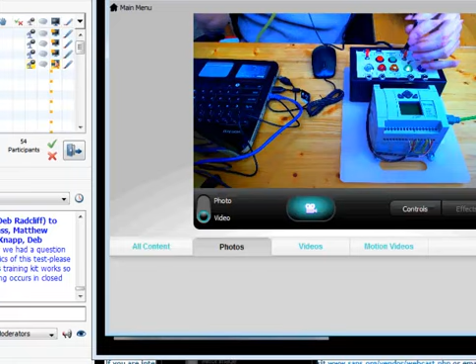I know it's a little hard with the lighting, but the red light is indicated, which would be a motor or a pump, and now we also have the green light indicating some actuation of a motor or pump. Just to show how this would work, we just updated this kit literally 2 weeks ago to now include real physical I/O. So here's a water pump, and I can plug it directly into the environment, and now you can't hear me very well because the pump's actually making some noise.

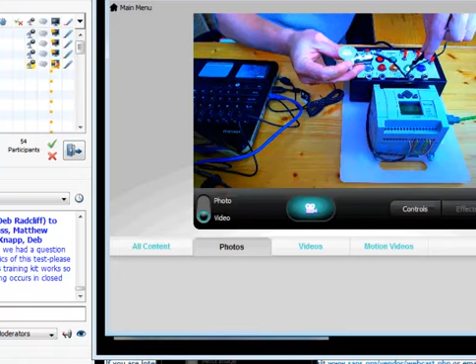But this is what I demonstrated at a conference last week, showing how you can attack a water tower specifically. And in this case, I also have a little solenoid here that's being controlled. This attaches to a little water bottle, which acts as my water tower. One of the many examples, we've also built this kit out for power grid or smart grid demonstrations, or even railroad manipulation switching. But this now includes the ability to include physical connections or capabilities.

So let me just show an example of just using RS Logix to do an attack. So you can see on my screen here, this would be an administrative platform that I can use to capture the payloads or the Ethernet communications going on between a workstation and the controller, and then potentially replay these. So what this application is showing is the current status of what's happening in this environment. You'll see that right now the green light is turned on.

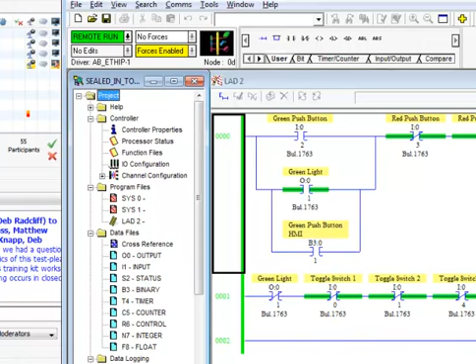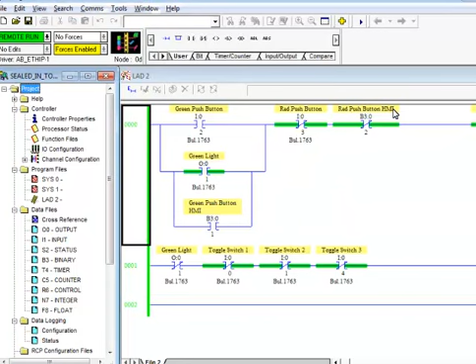Expand my screen a little bit. By the green indicator within the ladder logic program. If I were to turn it off, you'll now see that it's no longer indicated as being actuated. And if I go back to the actual physical representation, the real live controller, you can now see the red light is turned on and the green light is turned off. I'll turn back on the green light. I come back here to the RS Logix application, and now you can see that green light once again has been actuated. That would be our motor that we're actually running.

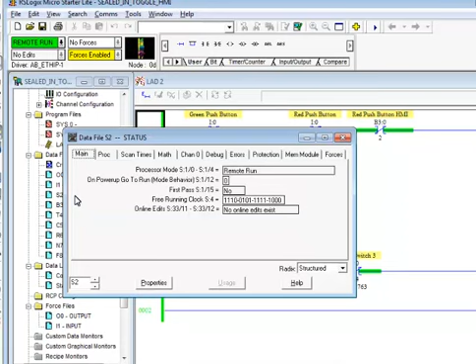It's very, very simple, that faulted attack that I was talking about. It requires you to change a bit within the status file. The status file is open to any authenticated user, and again, most of the PLCs that are out there and deployed typically either use a standard password or a password that's been around for years, or maybe even no password at all. And all I would need to do is go in to the Errors tab. You can see on my screen several bits that are stored within the local memory of this controller. You can also see up in the upper left-hand corner, it's in remote run state.

So this controller is set up. It's actually running and operating right now as we're able to change the sensors, the toggles, the push buttons, as well as the actuators, the outputs. All I would have to do is change this bit right here. And know that I'm controlling this environment over EtherNet/IP right now. So all I would have to do is capture setting this to 1, and immediately the environment becomes faulted. You can see in the upper left-hand corner, a fault has now been created on this controller.

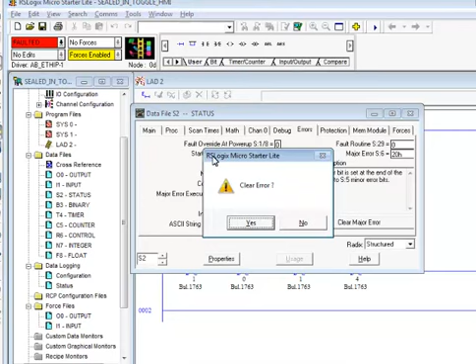If I were to go back and look physically at the environment, there's some little lights up here. I know you can't see them, but one of those is now lit up that says I've had a runtime fault. Now I'm going to go ahead and clear out that fault, change that value back to a 0, and then to re-enable it, I need to clear the fault within the application and then go back to a remote run state. So right now I'm actually just in a programming state.

Now, specifically the Allen Bradley PLCs can be configured for how they respond whenever there is a fault, whether they're going to turn off certain outputs or not. It depends on how it's configured, but the reality is, if I take out a PLC, in what state was

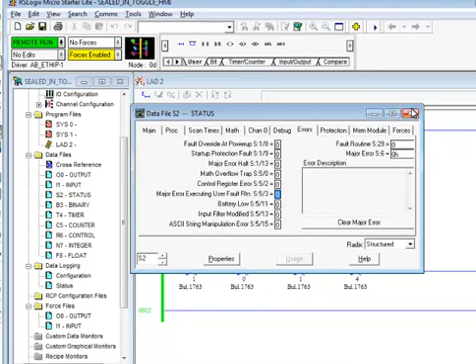that output left in? Was it in a crank-up state? Was it in a ramp-up state? Could some kind of physical destruction come out of this if I could take out the PLC? And that really depends upon the ladder logic and how it's been programmed, how it's going to act.

So let me show another example of an attack. In this case, you can see we're back in live, and here's my HMI operator workstation. I'm going to do some toggle changes, and you can see the input 01 just toggled up, and my output is no longer actuated. I toggled it down.

Again, the inputs are saying that there's an environmental change that has happened, a pressure change, a valve change, and then the output being actuated could be a motor. So whenever you have that red light being turned on, it could be a motor that just got actuated.

So the other example of an attack that I'm now going to do is using a virtual machine within this laptop, and it's based upon Backtrack. It's been heavily modified. I didn't want to have to modify it heavily, but the reality was to do some of these attacks, it required a lot of updates.

And in fact, I had to roll back from Backtrack 5 to Backtrack 4 Release 2 because Backtrack 5 wouldn't let me do man-in-the-middle attacks. There's some kind of network driver issue in the original release. I haven't tried it in the subsequent release because I've modified this so much.

But what I want to show is one of the labs that's available in here, Lab 5, and essentially it's already pre-scripted to do this man-in-the-middle attack, giving false readings to the HMI. And I do it using Ettercap. So if I go into the Ettercap folder, I then have some shell scripts that are already programmed.

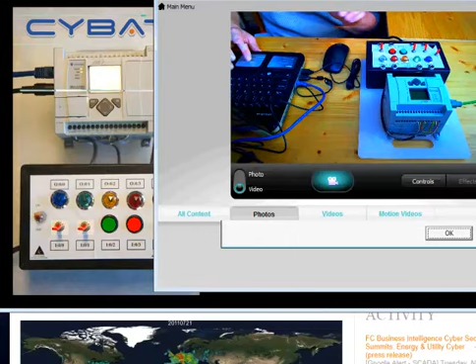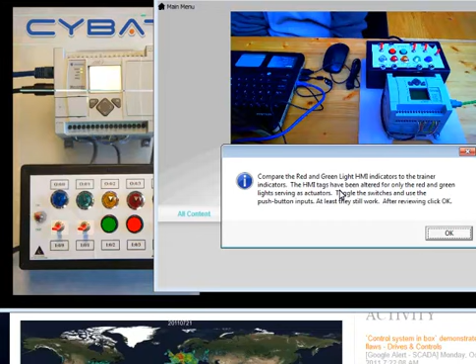So what's happened? Compare the red and green light HMI indicators to the trainer indicators. The HMI tags have been altered only in the red and green light, serving as actuators. Toggle the switches and use the push button inputs. At least they still work. After reviewing, click OK. Being that this is an exercise, you know what? We've nicely scripted the mouse to then swap everything back so that it works correctly, and now it's representing the environment as it really should be, with the green light being actuated, or again, the outputs being actuated correctly again.

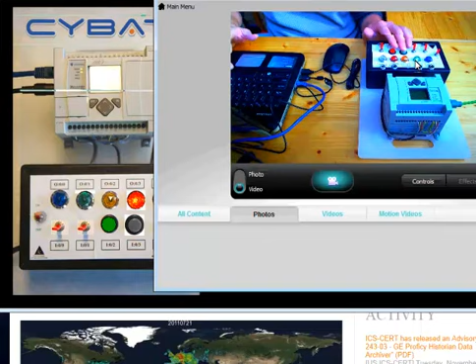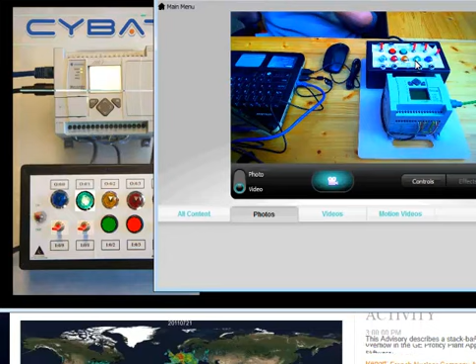So that's a tag swap, and that's essentially what can happen, or similar, you could say, to what Stuxnet did. And this was about a week's worth of work. The greatest amount of time from my standpoint was ordering a desoldering rework kit and actually getting better soldering skills, being that I hadn't been using some of my engineering discipline for a while. So those are the demonstrations that I wanted to show.

Give me just a moment here. I need to remember how to get rid of my full screen IE. Nicely, it tells me how to do that. And we'll go back to the presentation. So let me turn off my desktop sharing.

All right, let me summarize some of the security controls that we recommend, and recognize that there are lots of controls that you need to do for an environment. But these are the basics that you need to go through, and a lot of this is from the NERC CIP-ness that is out there that we've had to deal with specifically for electric utilities. Baseline your environment. Baseline what in the world you have. Find every system, every node, how it's configured, who administrates it, where the passwords are. You have to understand what you have. This goes back to the Sun Tzu comments of eons ago, right?

Perform segmentation of your control system environment, not only segmenting from your business network, but also segmentation even in the environment, let's say for the safety systems to the rest of the environment. And when you combine the baselining, even of what's programmed, you have to find out the ladder logic there. You need to look at detail of how the ladder logic is even crafted. What happens if a sensor goes away? If a sensor goes away, all of a sudden does a water tower release all the water, creating a flood?